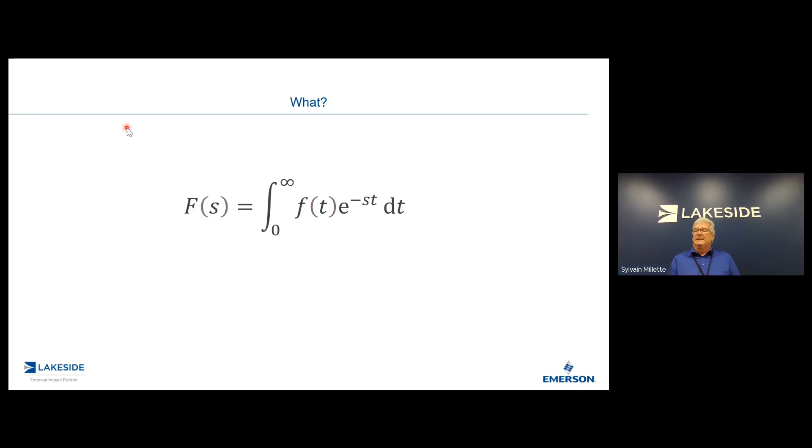Why do we do this? Because the physics of the world is described in differential equations, and differential equations are not always the easiest to solve. So the idea is you use what's called a Laplace transform table - you put in your differential equation, transform it into the Laplace domain, and that turns it into an algebraic mathematical equation. You can do your work in the Laplace domain and then bring it back into the time domain. So it's a mechanism to simplify the solving of differential equations.

Some of you may remember that the first derivative, dy/dt, is just a simple multiplication by the Laplace operator s, times y of s. So if you want to take the first derivative of a function, you just multiply by s, do the inverse Laplace, and there you go. And the integral is obviously 1 over s - that is the integral.

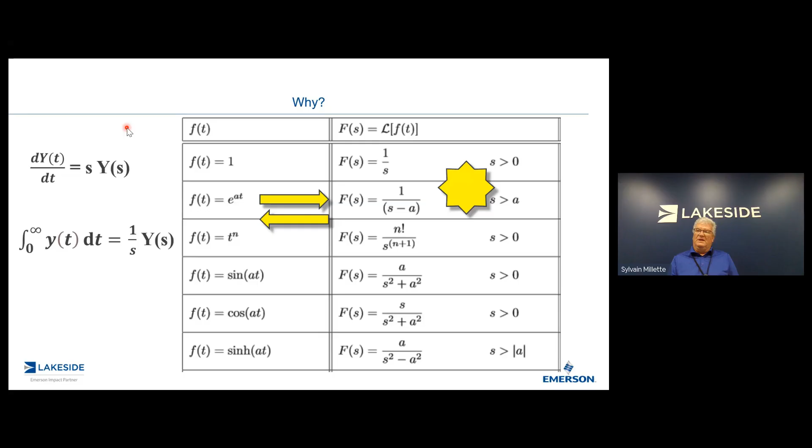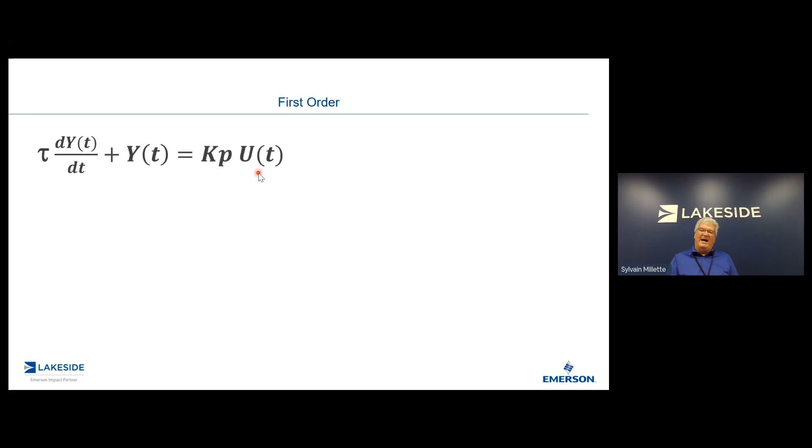Let's talk about different processes here. First order process - probably the most common type of process that we model - let's say a flow, or a liquid pressure, we will model as a first order process. Here's the actual differential equation of a first order process, where y of t will be your flow, and u of t will be the output change to the valve, which would cause the flow to react.

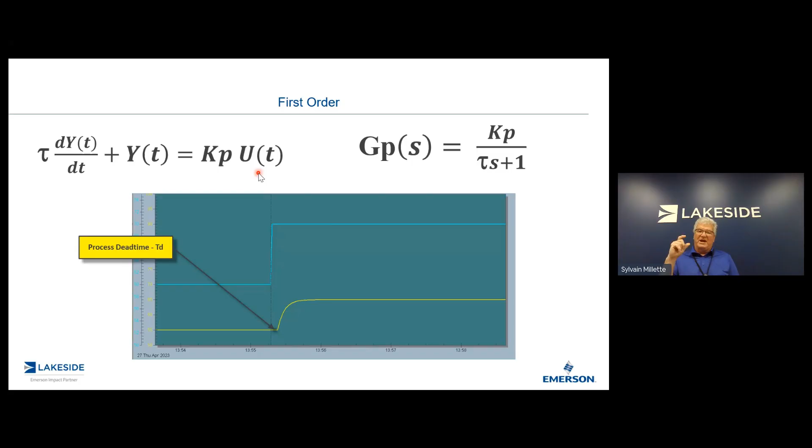Now, if we look at what an actual first order process looks like - one time constant, tau. I know I mentioned process dead time here - I'm going to deal with that elephant in the room later on, so I'm not going to deal with it right now. This is the actual Laplace transform for a first order process: Kp over tau-s plus 1. Kp being your process gain, your process sensitivity - how much change I get in my process for a given change in my output, which is the input to the process. So it describes the amount of change I get here for a given change on my output.

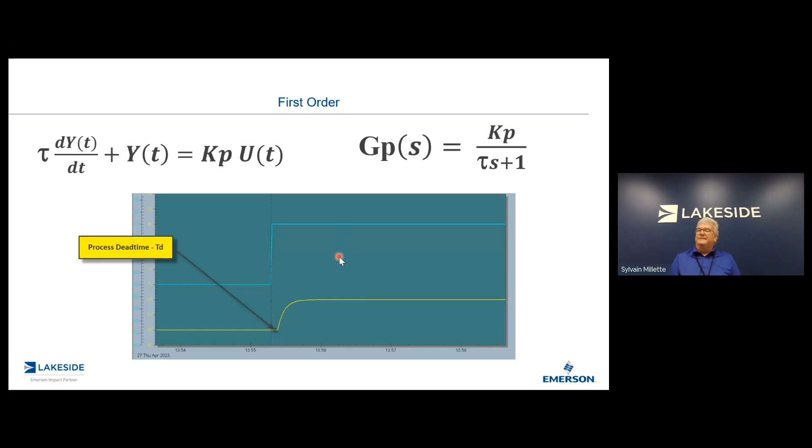How do you model that? You can model it here. I'm just showing you, basically, it's a filter block. So this would be the blue line here—if I go back, that's the blue line there. And the process measurement here would be the yellow line.

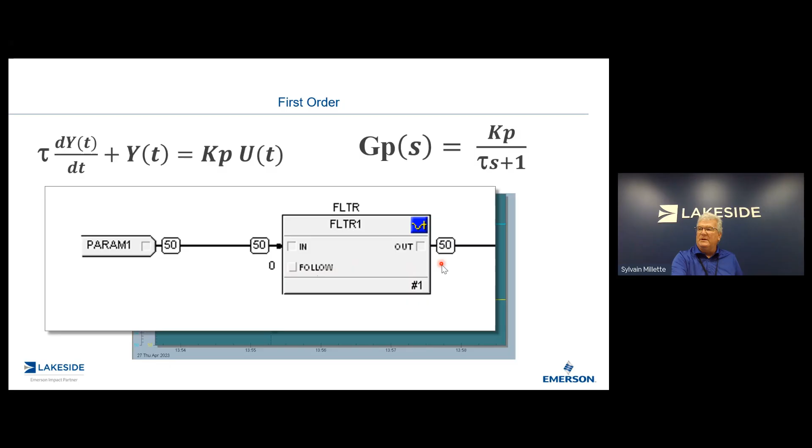Second order systems are systems that have not one, but two time constants. So there's a differential equation for a second order system. Now, second order systems can come in various forms, depending on the value of zeta. That is zeta there, and if zeta is greater than or equal to 1, a second order system looks like this.

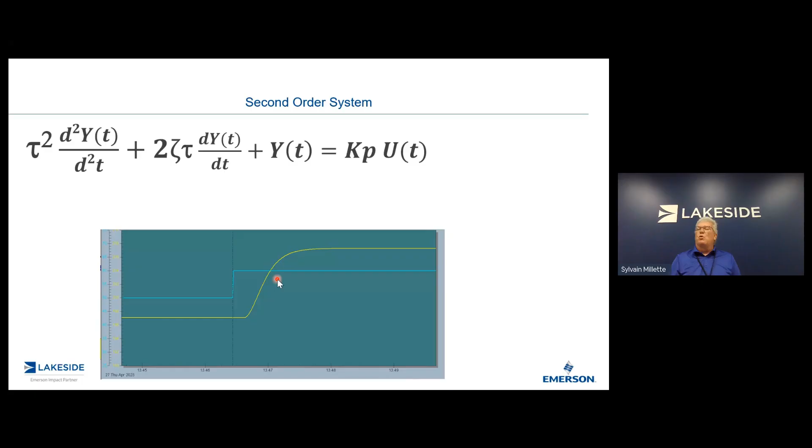Where you got your output change—and you can see here, before the first order kind of took off directly, here it's actually taking longer to take off. There's more inertia. There's a second time constant.

Now, I can explain this a little bit more, and maybe my next webinar will be on root locus and actually be able to explain this in more detail using root locus, but I decided to keep it simple for now, just to keep it simple.

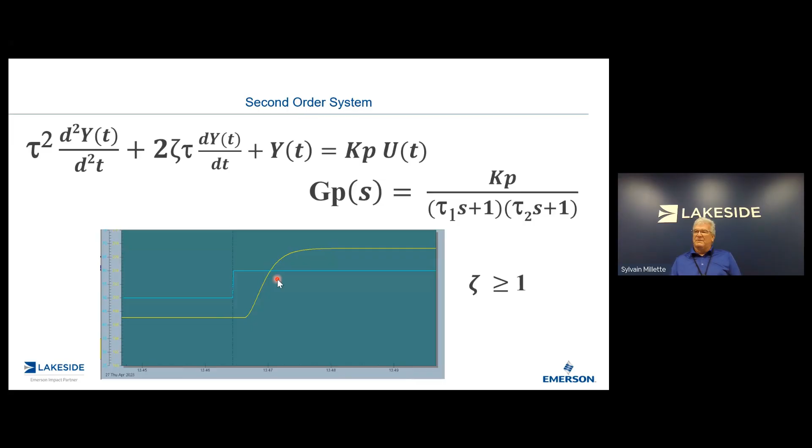Here is how you model a second order system: you put two first orders in series. So you can see here, the output will see a lagged response coming from the previous block. Here's my step change—I get a first order lag here, and I'll get my second order lag on that side.

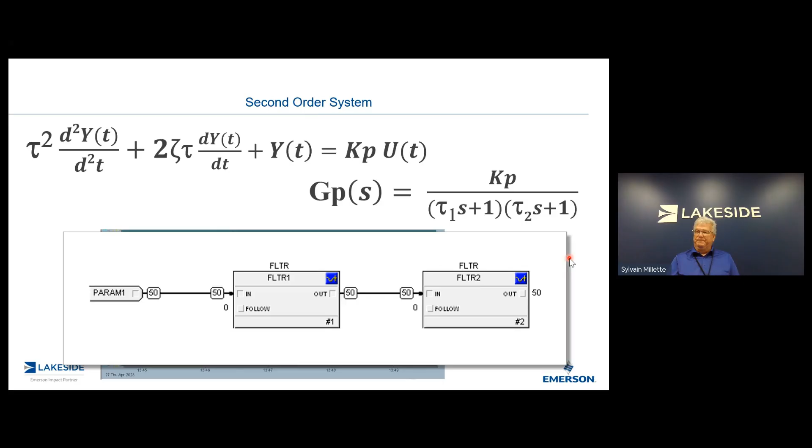Integrator: integrating processes are processes that are marginally stable. They don't settle out. Tank levels are integrating processes. If I put more stuff into my tank than I'm taking out, I'm integrating the difference between all the flows in minus all the flows out.

This is the differential equation for an integrator, and in the Laplace domain, it's just Kp over S, Kp being your process gain.

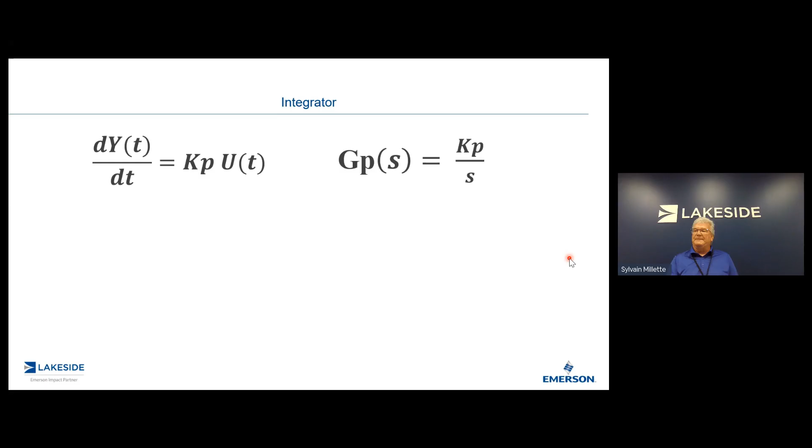So here you can see the blue line is the output command to the valve, and your process—in this example, I'm putting slightly less into my tank than I'm taking out, dropping it. I'm putting much less into my tank, my process drops. And when I do the next bump, I'm putting more into my tank than I'm taking out, so my process keeps on creeping upward.

Note that gas pressures are also integrating processes. If you remember your universal gas law, PV is equal to nRT—that's grade 10 chemistry, best 3 years of my life. The pressure, if PV—so we say that V, the volume, is constant—is equal to N, the number of molecules, R, a constant, and let's say T, the temperature, is constant.

Your pressure is directly dependent upon N, the number of molecules. If I'm putting more steam molecules inside my steam header than I'm consuming, I'm accumulating steam molecules and my pressure will ramp up. Conversely, if I'm putting less steam molecules in my steam header than I'm consuming, then my pressure will ramp down.

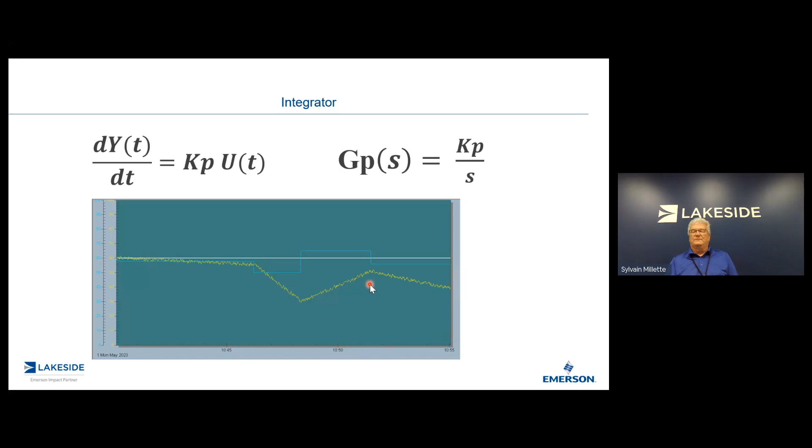Here's a couple of different ways—here we have an integrating block, this is all done in DeltaV. Another easy one is actually having a recursive addition block, so it will then integrate using an add block.

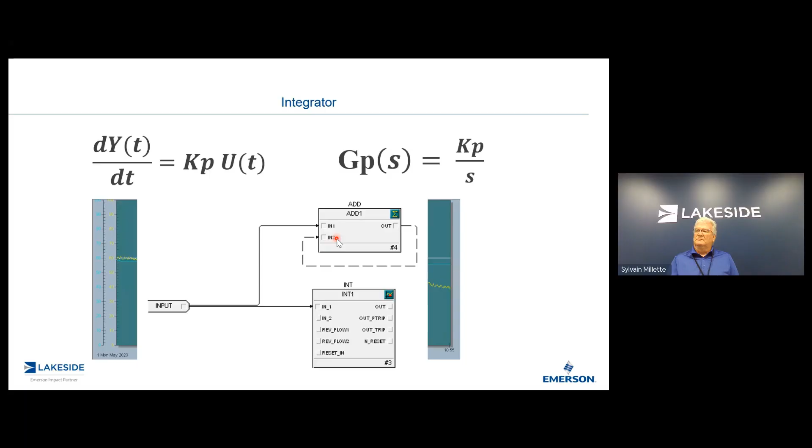Let's talk about our good old friend, Mr. PID—proportional integral derivative. Here is the actual equation of the PID. E of t is the error, Kc is the gain, Tr is the integral time, which could be seconds per repeat or minutes per repeat, and Td, uppercase D, is derivative time.

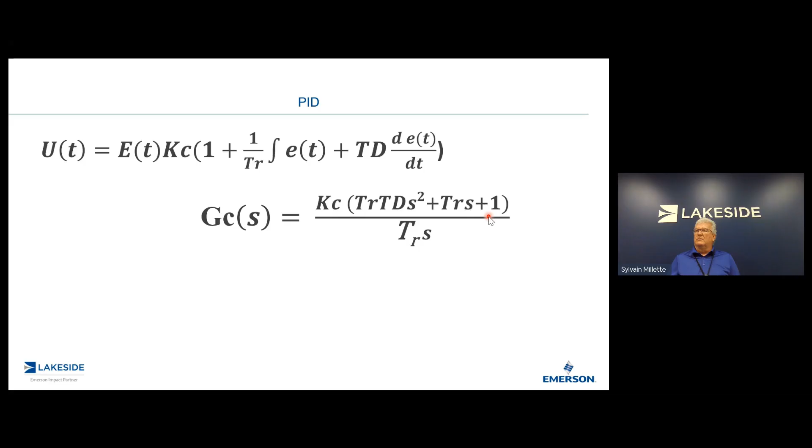Now here I'm doing derivative off the error. So here is the Laplace equivalent: Kc is on the outside, your controller gain, times TrTd s squared—it's second order—plus Tr s plus 1, all over Tr s. Tr again being the integral time. That is known as the standard form.

So a lot of times, if I go do some tuning on a system that I'm not 100% familiar with, I need to find out—usually I can find this equation, or perhaps this equation, in documentation, and it'll tell me if it's a standard form, could be a classical or series form, could also be a parallel or non-interacting form.

Now, about 90 to 92% of control loops use PI only. In a previous life, I developed a Lakeside tuning index where I looked at over 5,000 PID tuning parameters and PID blocks. I was surprised that up to 8 to 10% of loops use derivative, a lot higher than I thought. Just as a sidebar.

Now for PI only, we set TD to 0. This is a transfer function, Kc bracket TRS plus 1 all over TRS. And G sub C, incidentally, is the transfer function of a controller.

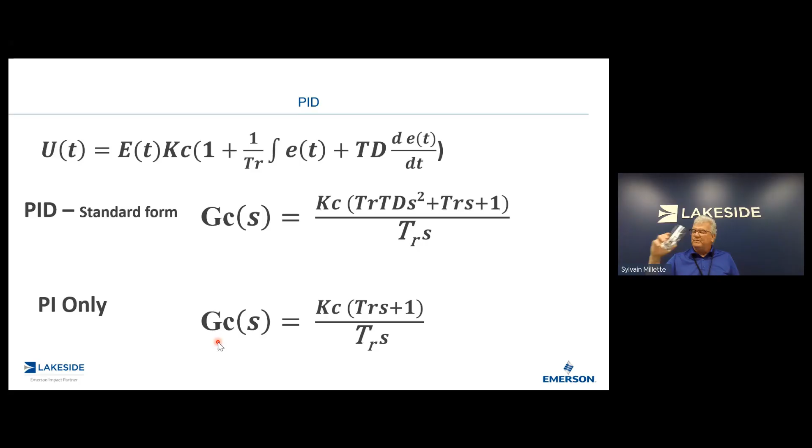There's a step response here. I did this where I changed the set point. The blue line is the command signal going out of the PID block. I make a set point change here. My PV is yellow, it is constant. As soon as I make a set point change, an error develops. I get my proportional kick, after which the integral takes over and keeps ramping up, ramping up, ramping up. Here, I've obviously disconnected my process from the feedback loop.

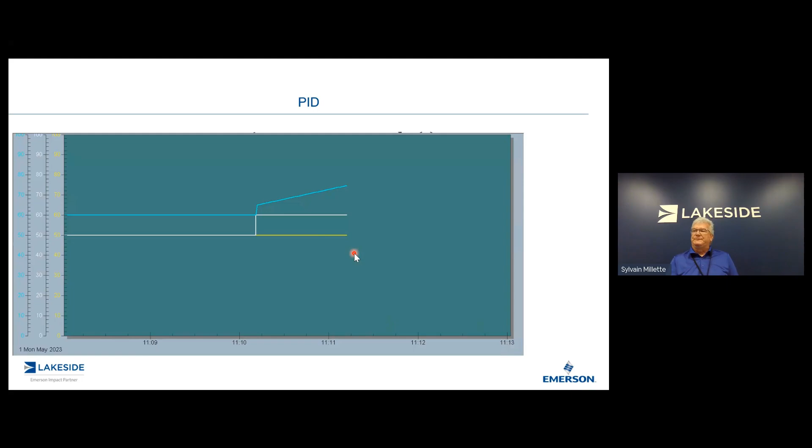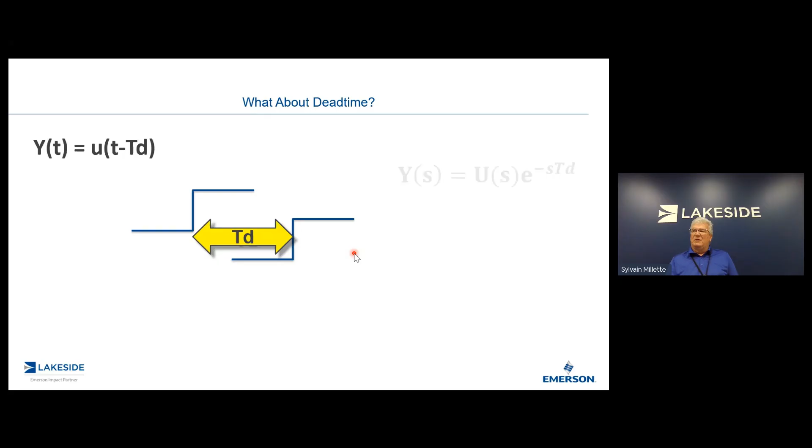Now let's talk about the elephant in the room, dead time. Dead time or time delay, don't call it lag, lag is something else, call it dead time. Essentially it's the time it takes for when I make a change before I observe it. That is time delay or dead time. The Laplace transform is e to the minus STD, with little d being the time delay.

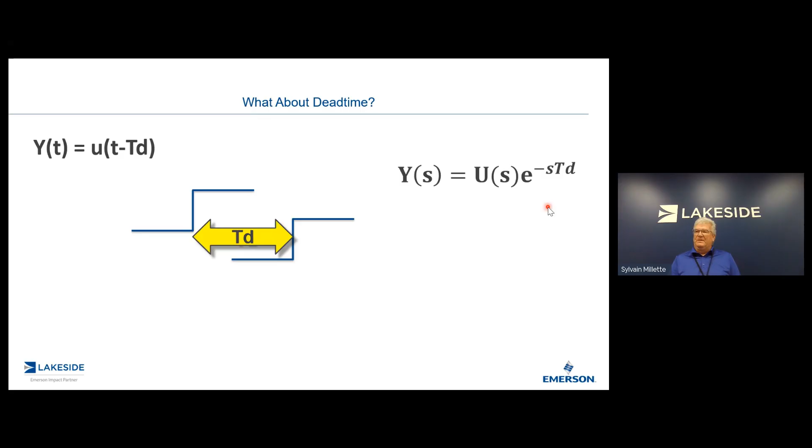But you can see here, this is not a nice clean algebraic polynomial. So when you solve for it, it makes the handling kind of messy. A lot of times you could use something called the Pade approximation, where you use this expression, going to second or maybe third order. It develops a reasonably good approximation of dead time that you can incorporate into your transfer function. So I'm not going to deal with it here, it really can complicate the math very quickly, so I'm just going to conveniently ignore it for now. In my next webinar on root locus, we can visualize it better and see the effects of dead time. But if the dead time is negligible, we can safely ignore it.

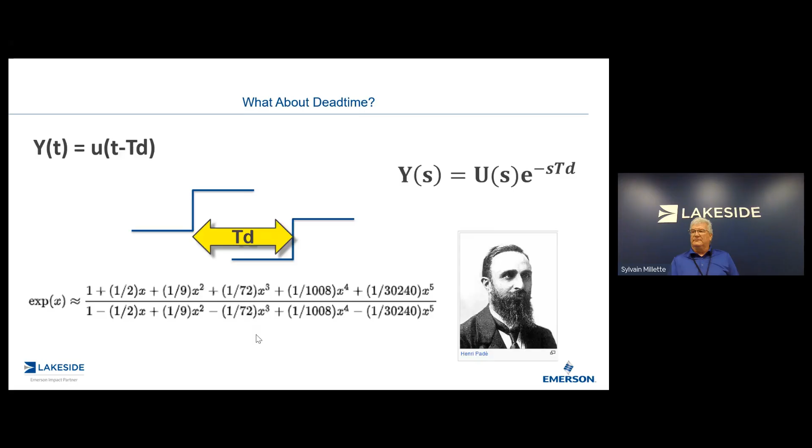And I'm just going to conclude here. I know this went fairly quickly, hopefully I didn't go too fast. But as I mentioned before, I teach loop tuning courses, and one of the loop tuning rules I teach is called the lambda tuning rule, also known as the pole zero cancellation method.

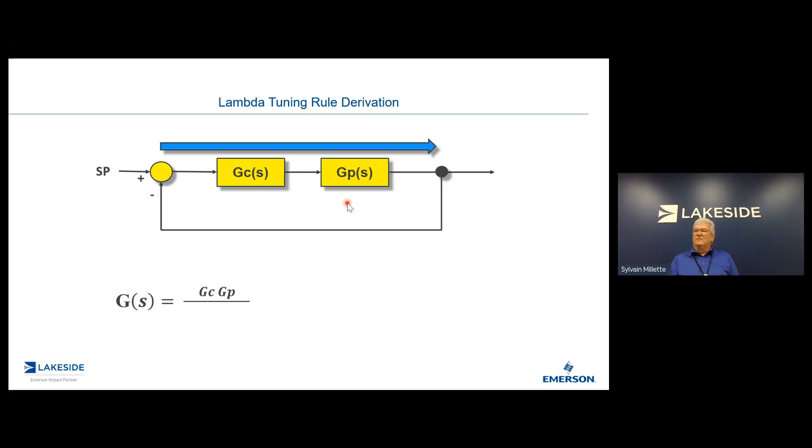So to develop the lambda tuning rule, we have our GC, our controller, our PI controller - I'm not going to do PID - and GP is your process transfer function. To calculate the closed loop transfer function, you go through once across, GCGP, divided by 1 plus one time around, 1 plus GCGP. That develops the transfer function between your set point and your PV.

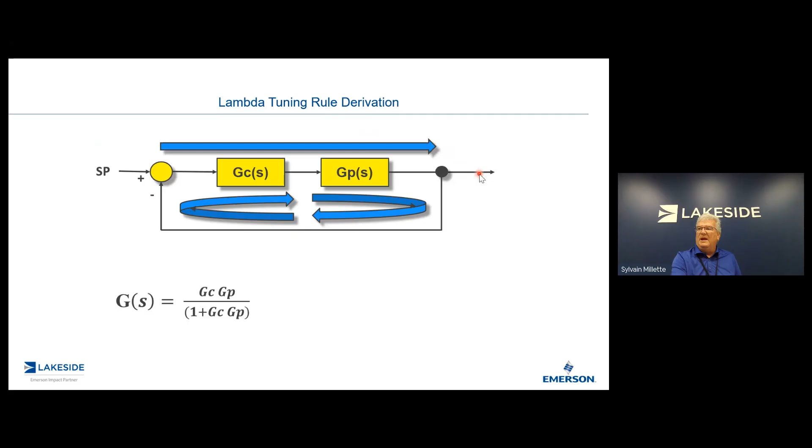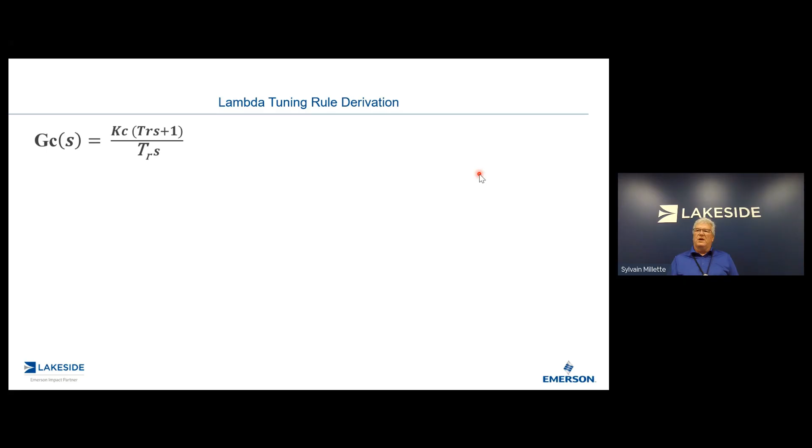So let's go back to here. Let's say our GC is our PI, KC controller gain, bracket TRS plus 1, bracket all over TRS - that's our transfer function for our controller. And GP of S is a first order, again safely ignoring the dead time for simplicity. So therefore G of S, the closed loop transfer function as we just showed, is GCGP divided by 1 time around. So far so good.

So therefore, GCGP, without going through the laborious math, is KCTRS divided by... Now one of the rules for the lambda tuning rule is that you make the time constant of the process equal to the integral time, TR. What we're trying to do is cancel out the dynamics of the process itself. So substituting tau for TR, those two terms get canceled out - that's what we're trying to do, we're canceling out the process. Therefore GCGP is equal to controller gain KC, KP, all over TRS. Still with me?

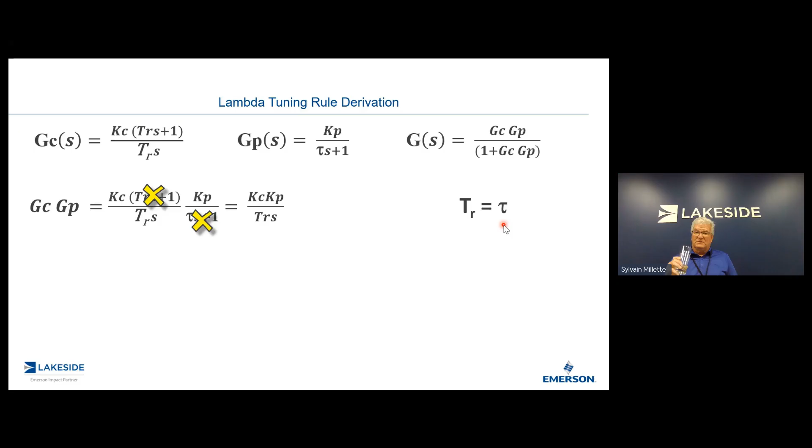So the closed loop transfer function is as such, I'm not going to repeat it here. And so the denominator, this part here, I'll put that over the common denominator. And so you can see the top denominator and the bottom denominator cancel out. So that then is equal to KCKP over TRS plus KCKP.

So what we're trying to do here, we're developing a first order closed loop transfer function. So if I divide the top and bottom by KCKP, this is what I get. And this is the end goal here. This is what I'm looking for, a closed loop response following a set point change. That is the closed loop transfer function. That is what I'm looking for.

So therefore, if I need to back calculate how do I achieve that, I will make my controller gain equal to 1 over Kp times Tr over lambda. And that here is a lambda tuning rule for the gain and for the integral action.

So you can see here with Laplace transform, I know we talked, and I kind of joked at the beginning, welcome to my nightmare. We talked a lot about how, and a lot of people in university say, I know I learned all that, but I really couldn't apply it to real life. I hope this kind of gives you a bit of a hint as to there being an application, and I'm trying to slowly build a bridge between theory and practice, and hopefully this webinar has been able to build a little bit of that bridge.

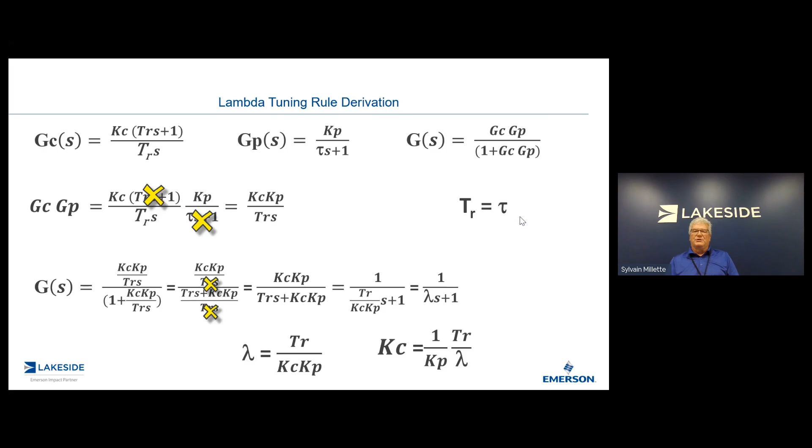So where is Laplace? I've actually been there. I've driven by it. It is a little town just outside of New Orleans right there.